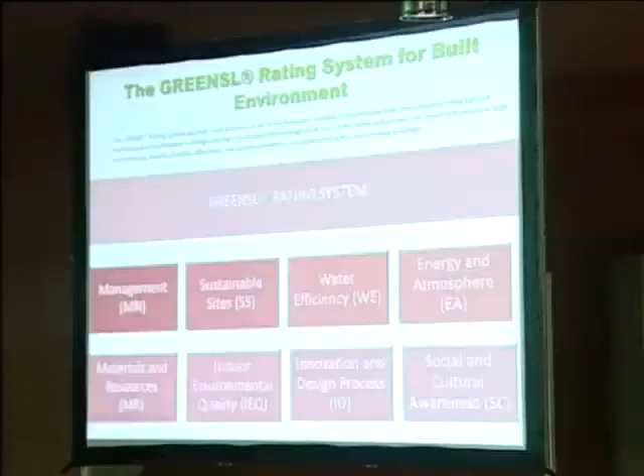If I'm talking about the Sri Lankan green rating system, there are 8 aspects we are concerned about. In the previous presentation some of these were mentioned: management, sustainable sites, water efficiency, energy and atmosphere, material and resources, environmental quality, innovation and design process, and social and cultural awareness. Those are the main aspects we consider.

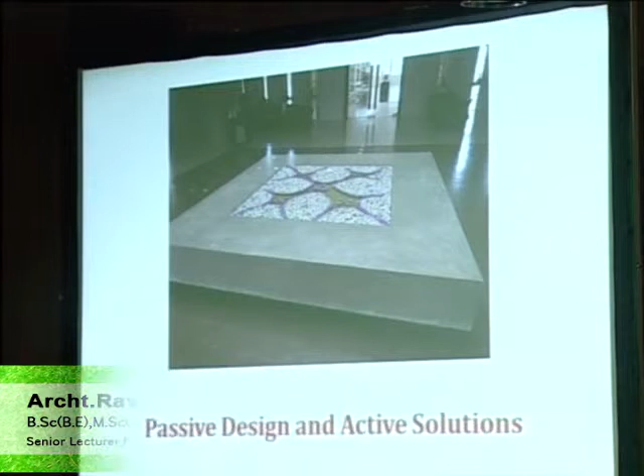Therefore our approach for design should be passive design combined with active solutions. We have to make a passive, trouble-free building at the time of designing, and then go for active solutions. Active solutions should ensure less energy consumption without compromising the comfort of the occupants.

For energy and atmosphere, take this well-known building in Sri Lanka called WTC, World Trade Center. If you consider the monthly electricity bill of this building, it's 42 million rupees per month.

If you consider this premises, BMICH, the monthly electricity bill is about 4 million per month. If you take the Sri Lanka Parliament, it's also about 4 million per month. Energy cost means energy consumption, and we are going to face a huge energy crisis within this year.

This building is now a gold-rated building under the existing building category. Consumption was reduced by 20 to 25%, meaning 8 million rupees saving per month.

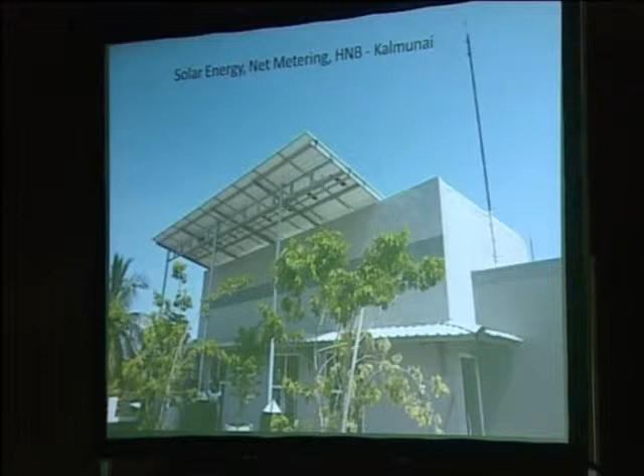How was this achieved? We'll discuss later if time permits. This next building is Hatton National Bank, and the person who did this work is here in the audience, Mr. Jayasundara - I'm glad to see him here. While thanking him, this is another platinum-rated building.

Why was this building platinum-rated? This is the least energy-consuming bank in Sri Lanka, compared to all the banks in the country.

Why? There are many features - solar energy, net metering, and energy consumption per square meter that is the least in Sri Lanka compared to all other banks.

And this CCB building, which is going to be another gold-rated building, has solar power and green facades coming, along with many other features.

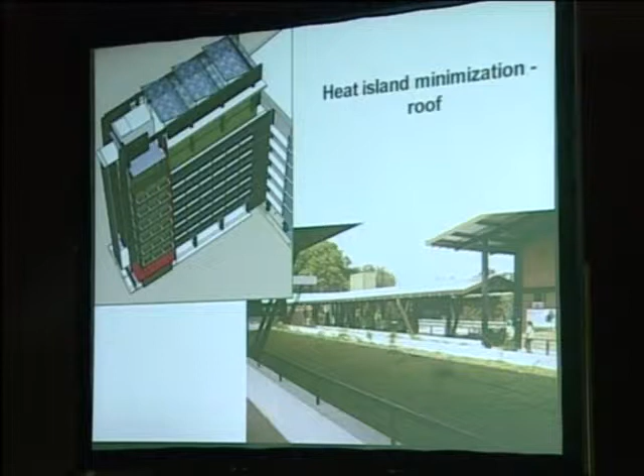You can reduce the heat island effect by having solar panels on top of the roof, as well as having a roof garden.

This is Mas Fabric in Thulhiriya, again a platinum-rated building, shown on the right. By having greenery on top of the roof, you can cut down the radiation heat, and we can also go for natural lighting.

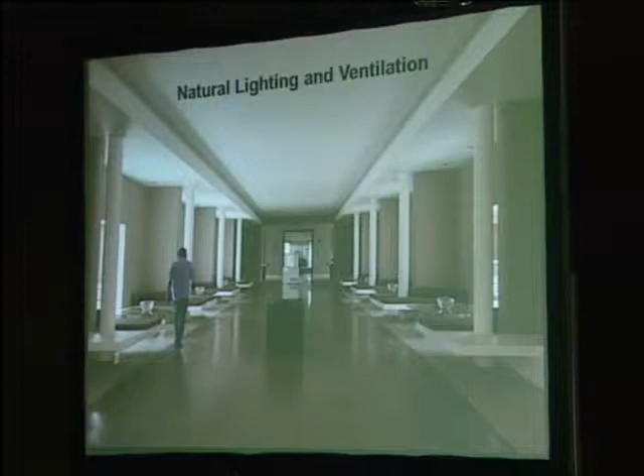Natural lighting is readily available in the Sri Lankan context since we have a tropical climate - we can get natural lighting all the time. The possibilities are available, and we can go for light ducts.

This is possible - this is around 6 o'clock, and you can see how the lighting level is there. This is a solar tube system, a passive system of getting light for a building.

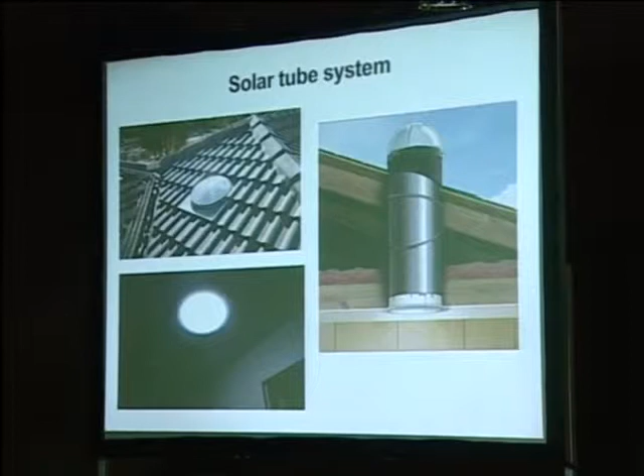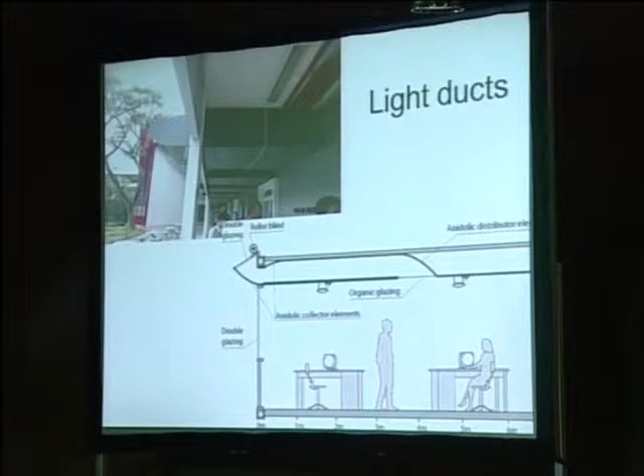For the other floors, if it's not the topmost floor, we can think of having light ducts, which is a very much environmentally friendly approach of getting natural light. Light ducts work through multiple reflection, and for about 5 meters it's going to be very much suitable.

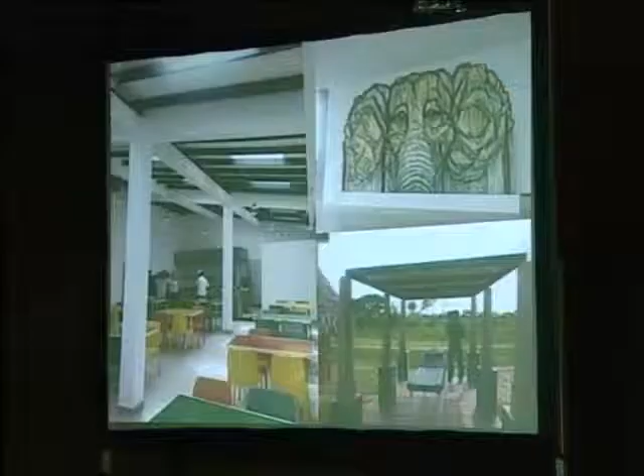And this is the Alia project, the elephant project in Dambulla. You can see some areas using natural light very productively, though I think they could have used it more productively. We have given some suggestions, and they have also applied for the rating.

They are keep on improving their status now. If you talk about water efficiency, I put this figure here because this person never washed his face for 37 years. He hasn't consumed any water apart from drinking, not for any other functions. This is on the Yahoo website, but that is not the conservation that we are expecting.

On average, a Sri Lankan person consumes more than 120 liters per person per day, which is a massive consumption. We can reduce up to about 80 liters, which is possible. Again, I am talking about concepts.

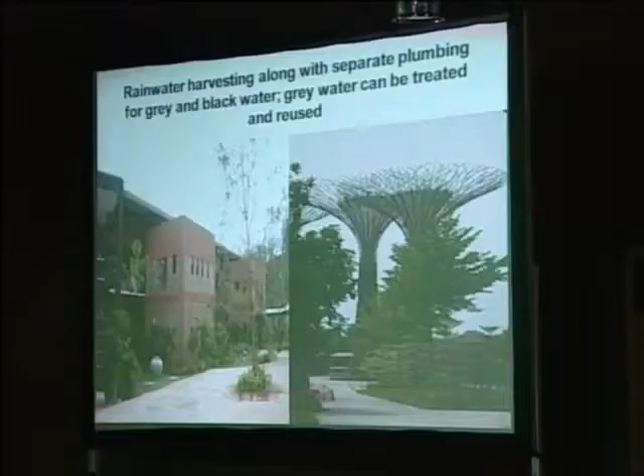You can see on the right-hand side Singapore Skywalk. It's a theme park, a steel structure made to look like a tree, steel tube structure. But in the middle, there's a rainwater harvesting system. On your left-hand side, you can see MAS Holdings Thurulie, where they collect the rainwater at the top. Actually, this is the rainwater collection tank, and you have the toilets underneath.

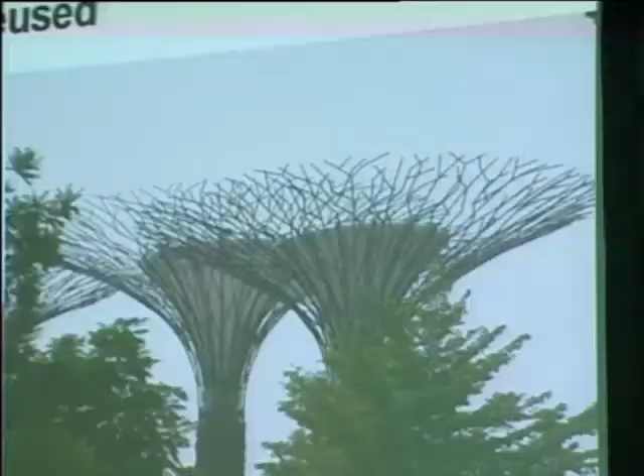Therefore, there is no electricity consumption for pumping the water. It is totally gravity, right? No need for pumping. That's the concept of how we can use it.

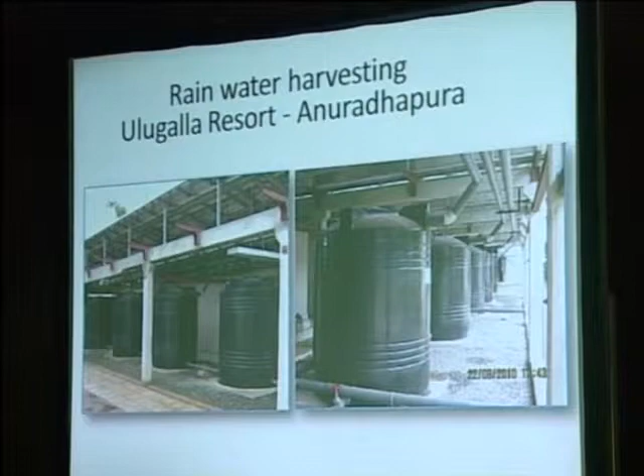This is rainwater harvesting at Ulugalla Resort, Anuradhapura. More than 40,000 liters they are collecting. It is very much sufficient for their consumption, rainwater harvesting. Even for drinking, they are using this.

This is HNB Kalmunai. They are using a rainwater harvesting system. That is why they have gone to platinum. And they are consuming what they collect.

Different uses - washing, gardening, a number of uses, not necessarily for drinking. If you can't go for tertiary treatment systems, maybe you can use it for gardening, washing vehicles, other functions, toilet flushing - practically you can use it.

100,000 liters - the entire air conditioning chiller makeup water is what they are using with this rainwater now. Therefore, it was very successful, and they are collecting the facade water, using it for air conditioning makeup water. It was very successful, and their cooling tower water loss per day is more than 100,000 liters - cooling tower water loss - and they are planning now to reduce that.

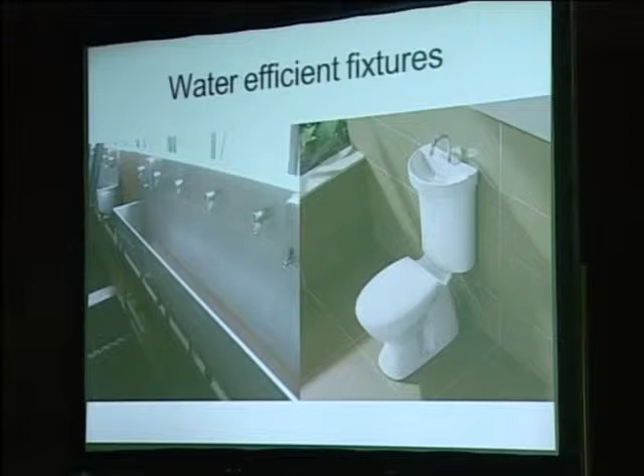Now there are many fittings and appliances, filter-rated taps and things like that, and integrated closets - now they are in the market. You can reduce the water consumption. While you are washing your hands, the closet cistern itself is getting filled, where you can reduce it by 70%. Therefore, fixtures and fittings and other technologies like rainwater harvesting systems will do the job. Now these things are possible.

Actually now we have an issue at Rathupaswala where these people don't have drinking water. The best option is - there are two things to face these situations: mitigation and adaptation. Mitigation is avoiding further polluting water, air, and other resources. Now we have to stop that, but you can't get the effect immediately.

Therefore for the Rathupaswala area, one good solution would be rainwater harvesting. There isn't that much capital involved, especially where it has rained throughout the day.

Most of the time we have hardscape areas where the groundwater table is not getting recharged, because of bitumen paved areas, concrete paved areas and things like that. Every time we have hardscape areas, the groundwater is not recharged. As a result, even for a slight drought, all the areas and trees are getting dry.

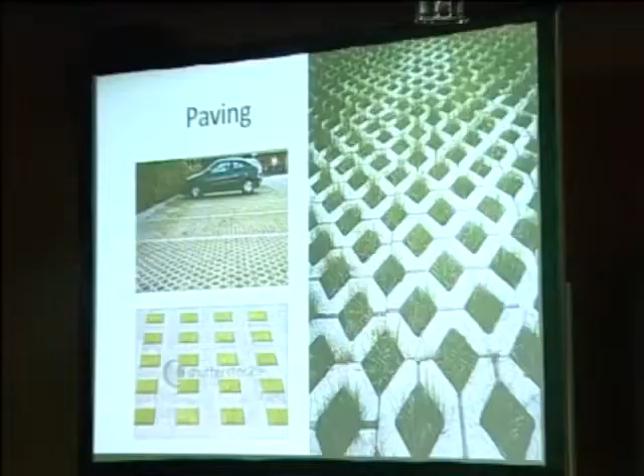To avoid that, we have to think about groundwater recharging systems - grid paving systems, which are now becoming a bit popular among Sri Lankans, even architects are promoting this. Grid paving helps minimize the heat island effect, as well as improve the ground seepage of water, which means we can improve groundwater recharge.

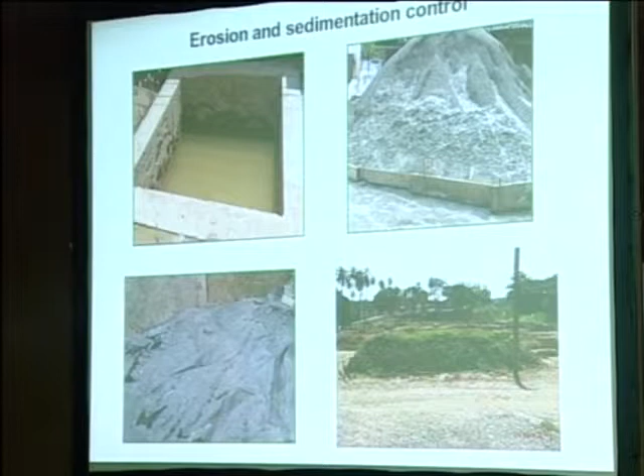Regarding erosion - at the time of construction, what we generally do is remove all the vegetation around the site, which is not good. Actually, we can control erosion with these sorts of techniques, even using grass to cover the soil until needed. There are many ways we can do that. Small things make a big difference.

This is one example - a factory where at the time of construction, even after construction, we haven't removed the grass. It's a very simple factory with minimum construction cost. It's an office building for the factory - the same factory I showed.

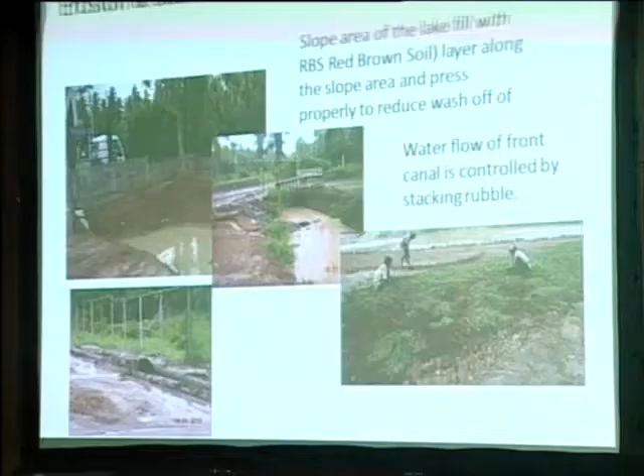This is Vario Systems Badalgama, again a platinum rated factory building in Sri Lanka. At the beginning they had a big issue with erosion - you can see the pictures here, how it was initially. Huge erosion, going to the downstream areas, with a lot of soil particles going along with the water.

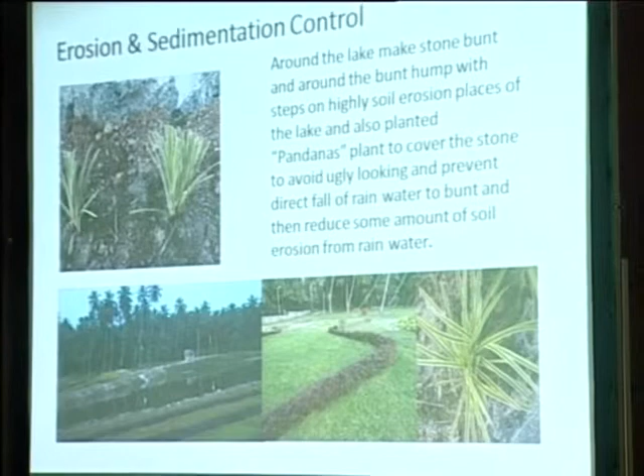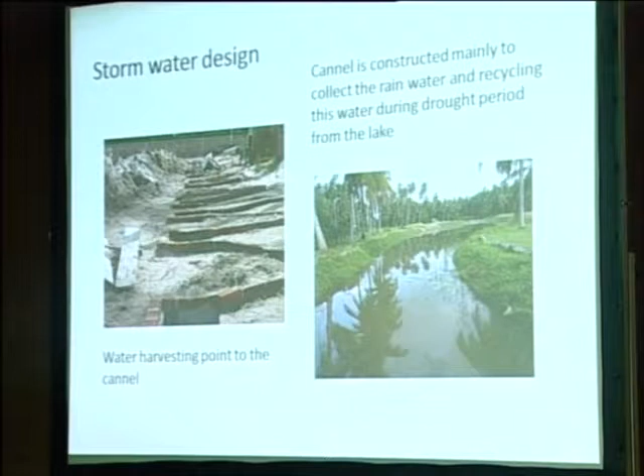They had many issues. Then you can see the color of the water - they have done a lot of things to prevent the downstream waterfront from getting contaminated with soil particles, and you can see how well they've done that. They are collecting and directing the water to this collection pond, and the color of the water gradually improves until it becomes natural and neutral. Huge improvements they have done.

Materials and resources - why not think of local and regional materials? Don't think of materials that last about 100 to 200 years; we have to think of materials which can be rapidly harvested within our regions.

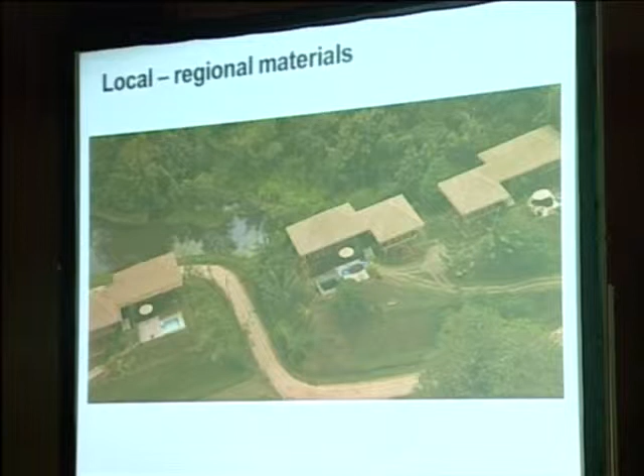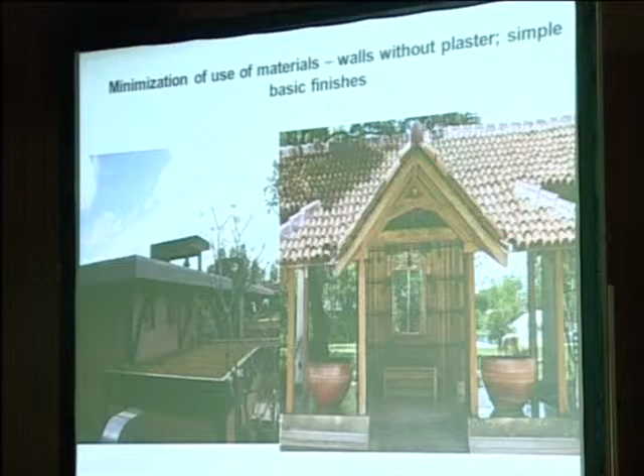This is Ulugalla Resort, using more or less natural and local resources. Fair-faced finishes are much better - not artificial, it should be fair-faced without that much treatment. You can use the materials as they are. Fair finishes actually give attractive interiors without even plastering the walls. There are many ways in which we can achieve aesthetics without compromising cost and the environment.

Case one, again a good thing - they have done a refurbishment rather than demolishing the building. They have gone for good finishes and things like that, at Katubedda.

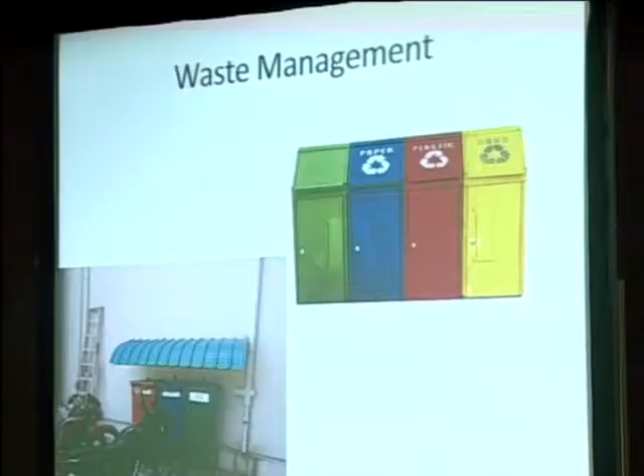Waste management is one other thing we have to think about, and for indoor environmental quality, we have to have a separate ventilated area for chemical storage areas.

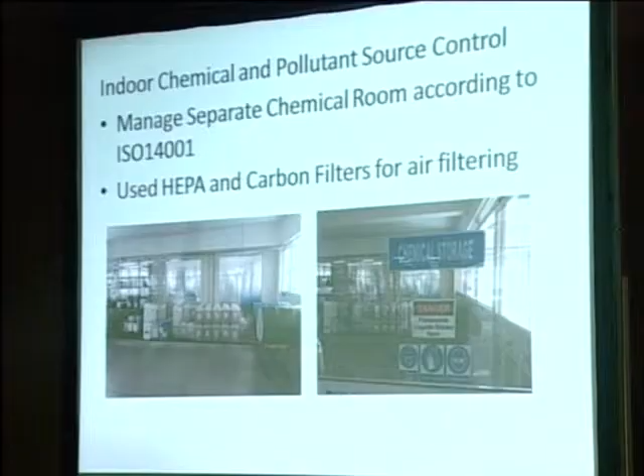This is again Vario Systems - they make motherboards for soft toys. It's actually a very complicated process. In that process they emit a lot of chemicals, using a lot of chemicals, and they have separate ventilated areas for chemical storage.

Their indoor environmental qualities are very much within the standards. There are many standards that we have to follow, starting with many codes and things like that we have to follow.

You can see daylight and views in the same factory building. The people who are assembling things can have outdoor views, and if they are bored with their work, they have the chance of viewing outside. Here, I don't think we have that option. If you are bored with my lecture, you don't have outdoor views.

And here, for this particular window, I have used a treatment that's not water-based, not varnish coats or something on top. It is a burnt engine oil treatment. We have done a lot of experiments in the university about this one. It's very successful, and we'll tell you the results in the future, how successful, because I was inspired from the railway sleeper treatment process, which uses burnt oil. This is very useful.

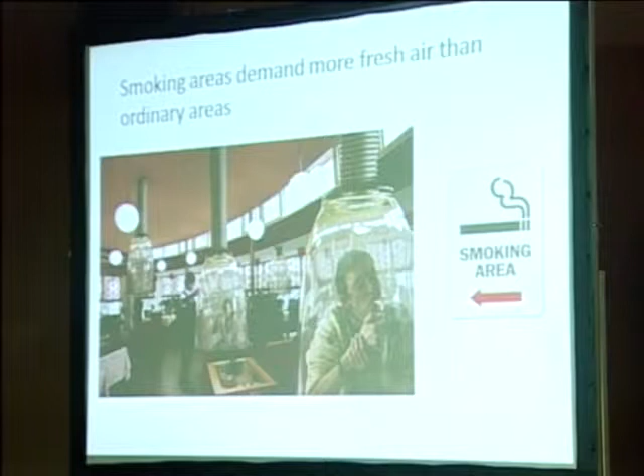And we have to prevent smoking in the buildings. It can anyway be done, because it's not only beneficial for the people, but it saves energy - smoking areas demand 4 times the ventilation than ordinary normal living areas. And these are the ways in which we are measuring.

There are many devices to measure CO2 levels - carbon dioxide, monoxide, SOx, NOx, COX levels, sulfur dioxide - all these can be measured now. Even volatile organic compounds, VOCs, need to be measured, because those cause sick building syndrome, making us sick. When CO2 levels go beyond a certain level, it makes us sick. When VOC levels go beyond certain levels, it's going to make us sick.

On average, if you take some air-conditioned buildings, within the premises their CO2 levels are more than 1,000 parts per million, which is not accepted by the World Health Organization. It makes you drowsy, uncomfortable, maybe chest pain or headaches. All this is because of indoor environmental quality, most of the time, where we can minimize those issues with passive ventilation systems. It's not necessary to be air conditioned.

Social and cultural awareness - Sri Lanka was one of the famous countries for its social interactions. If you take the listing of Sri Lanka in the Happy Index - generally you measure the development of a country in terms of per capita income, but going beyond that, the world has come to a particular index called the Happy Index or Laughing Index, and we are there. Sri Lanka is ranked 15 in the Happy Index. Therefore, we are happy. We have to be happy.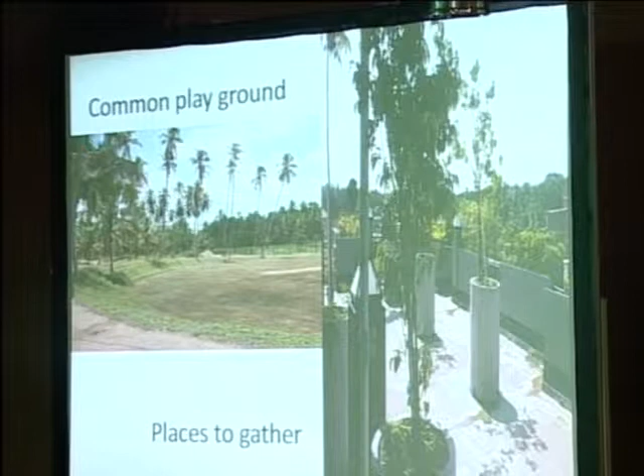And after that, they are dropping their workers to their destination, a carpool system. It's part of the green concept.

And even these particular playgrounds are common for the villagers. They can use that one. You get marks for those.

And on the rooftop of this Kalmunai building, they have made a green garden, which is impossible because of the climatic conditions there, but they are successful. They are using air-conditioned condensed water to water these particular plants, so no extra water is required for this.

If you take a typical air conditioner of about 9,000 BTU, within 1 hour of moderate occupancy, you can collect more than 4 liters per hour, which can be effectively used for drip irrigation for these plants, which is going to be really effective.

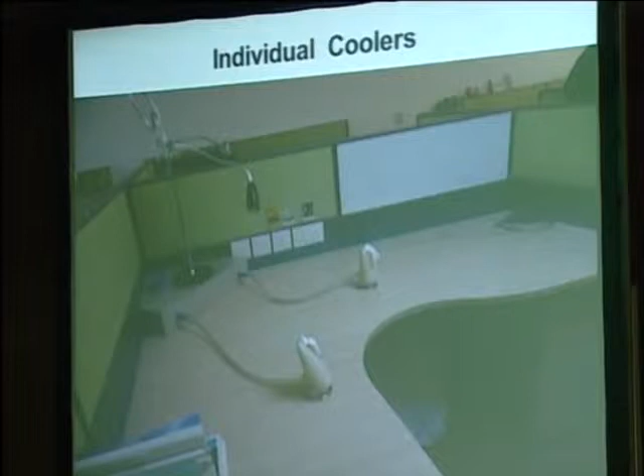And for innovative design, let me quickly rush through the rest of my presentation, another 2 minutes more. This is basically the cooling system, individual coolers. Rather than cooling the entire premises, you target specific areas, in and out.

You can reduce air conditioning load by 6%. If you have this sort of vertical greenery, it can cut off 3 to 4 degrees Celsius, which in turn gives a benefit from energy saving. These things are common.

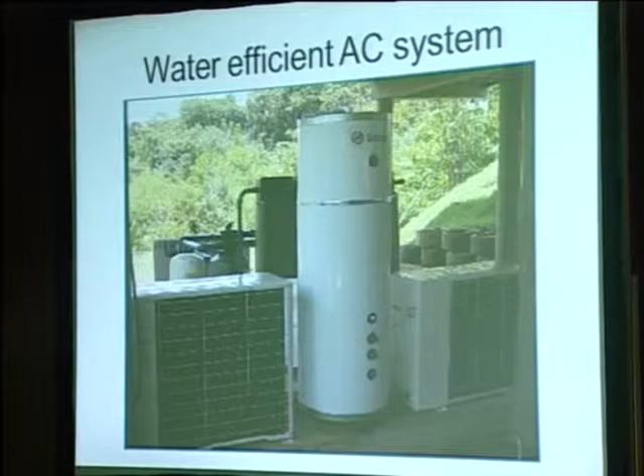And again, if you go for air conditioning systems, this is at Ulugalla. Now it's common in the world to a certain extent. We can convert this recovered air conditioning energy to heat the water, preheat the water. Of course, we have an internal unit and an external unit. The internal unit is absorbing the heat and passing it to the outside.

Whatever energy we are passing to the environment, instead of passing it to the air, we pass it to the water, and we can use that energy to preheat the water. That sort of technique is available.

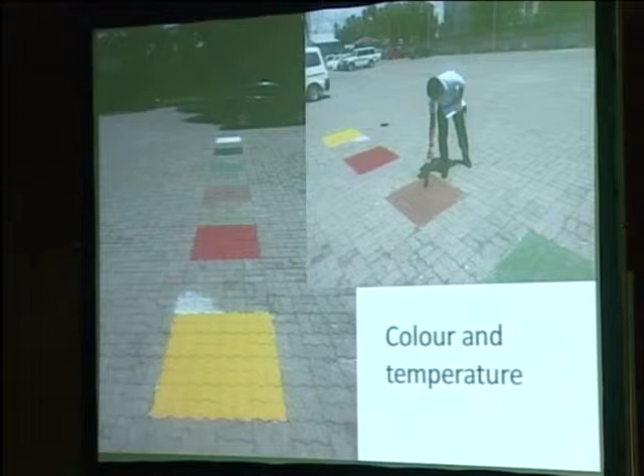And we have measured, even the color matters. We have done a lot of experiments with colors. If you take outdoor paving, using black color pavings during the noon sun, this is the case in Katubedda where we did this experiment, we found that the surface temperature on an average day goes more than 46 Celsius for black color. If you go for white, it's about 36. That's a big difference, but actually we can't use white for the paving systems.

But if you take a car park covered by trees, the surface temperature of these blocks is 28 Celsius. Therefore, having a car park covered with trees is the ideal condition to minimize the heat island effect.

Therefore, most of all, we need an attitude change, naming the building functions to create a sense of belongingness. Rather than saying library, why not say 'my library'? Rather than saying research room, we can say imagination room. Rather than saying committee room, we go for think lab.